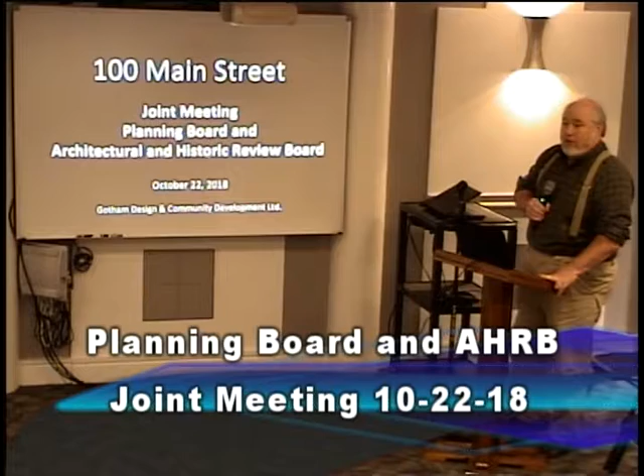The drawings we're presenting tonight are the ones submitted to both the Architectural Review Board and the Planning Board. We gave it to the Architectural Review Board as part of your submission for this joint session, and we submitted it to the Planning Board for their call for a public hearing at their next meeting. Since you guys are so familiar with it, I don't think I need to go through a lot of detail.

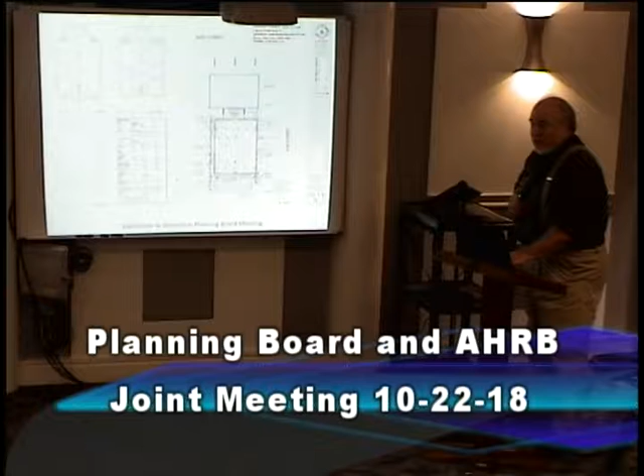Right, I think it would be good if you did. I just wanted to make sure that the 10-11 set is the most current one that we're talking about. Yes, the one that we submitted for this meeting. Okay, so these are the drawings that we submitted to you. They're obviously a little bit difficult to read in the full sheet, so what I've done is scan them to a slightly larger scale.

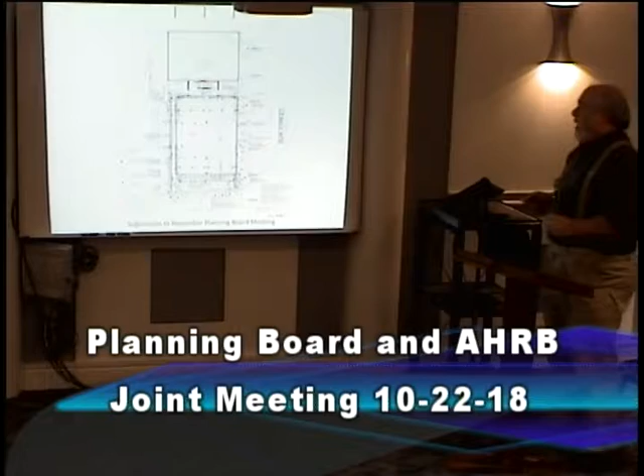This is the original building up in the front. We are proposing an addition on the back of that building, fronting on Elm Street. It's one structure. A lot of the issues we talked about a while back, maybe two years ago, with open walkways and things like that, which had comments and concerns, are not in this scheme. This is a perhaps more conventional approach to it.

What we've proposed is a total of 4 additional units, with 2 on each of the floors above, second and third floor. There are 2 existing units in the main building, which will remain 2, although we may be changing the configuration. If we can flip it, instead of having 2 duplexes, we'd have 2 flats. We'd be able to make the ground floor flat an ADA compliant unit, which we think would be a good idea.

If we look at where we're at, this is the facade facing Elm Street. This is the existing building. Here's the open area where you drive underneath the building. We've taken ideas from previous schemes.

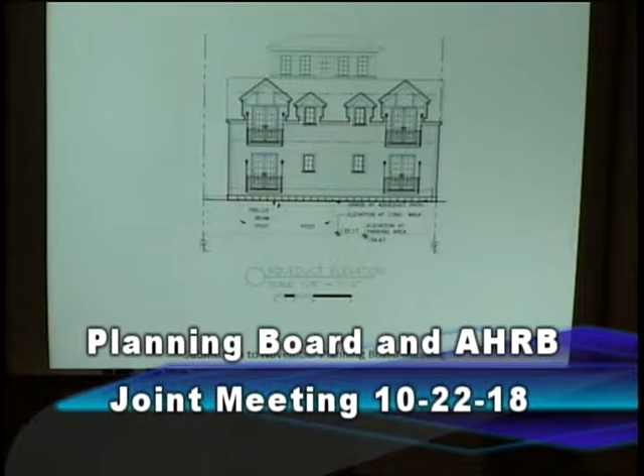One other thing I should point out, going back to that site plan, this is the existing retaining wall for the aqueduct. The closest we are here is 10.6, or 10.3 I guess. And that slopes away from us, so at this end we're around something like that. The brise soleil, or the trellis, comes out about 5 feet.

We've had a suggestion made by the village engineer. I don't know if it falls into his purview, or the planning board's, or everybody's, but he's noted that what we're doing with the spacing under the building is what we'd need if we were a commercial property. He's suggesting that if we wanted to give it some thought, we might be able to reduce the space between the parking spaces so that we'd actually be able to get the cars fully under the building, which I think would be the preference of all.

But we've also shown a significant amount of augmented screening along the aqueduct. I think most of you have walked by and seen that, even though that existing building is up on the aqueduct line, you're actually seeing trees more than anything else—you're seeing the building kind of through the trees. Obviously as we lose leaves, you'll see more of it in the wintertime. So part of what we're thinking here is augmenting the planting with broadleaf plants that don't get devoured by the deer, so that we'd have year-round screening for the building.

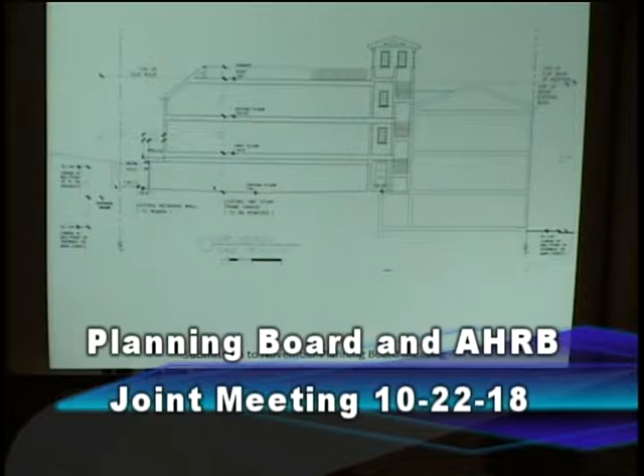Where it is, maybe it's not in here, but it probably doesn't matter. This is just other stuff we had.

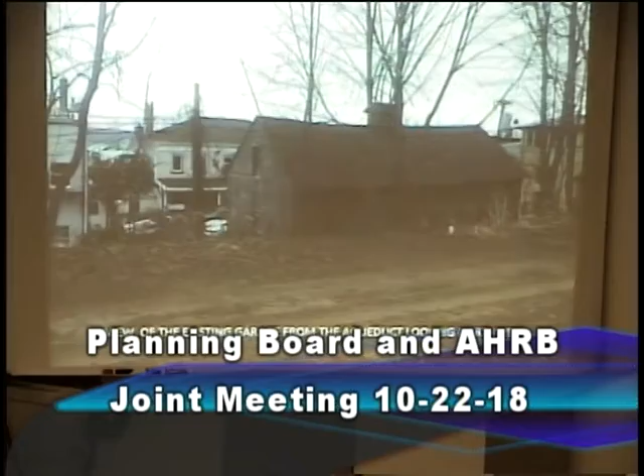Now, last thing is, I'll see if I can find it, because Steve Hunter asked if we could show some of the stuff from before, and I'm not sure that we have it. I don't think you need to see these kinds of things again. Well, actually, that's what I was thinking.

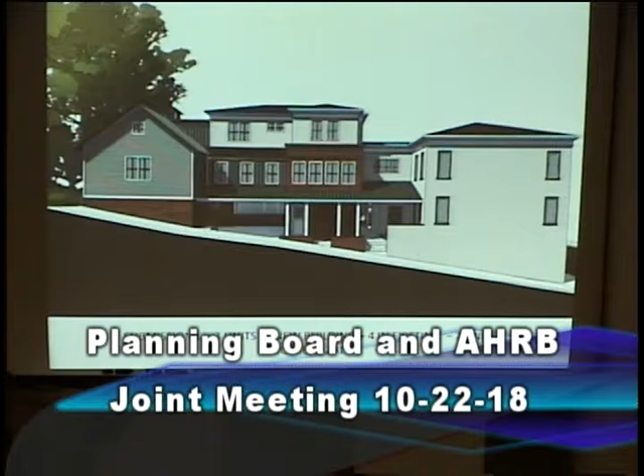Okay, so this was the design we presented in 2016, which the planning board adopted a resolution recommending for approval to the board of trustees. Obviously, this positioning is negated by the 10-foot setback to the aqueduct, so we're not really able to do it that way any longer.

Let's see if this goes away. No, that goes. The other thing is we do have a SketchUp we've done for this, and we'll try to get you some views that might make sense.

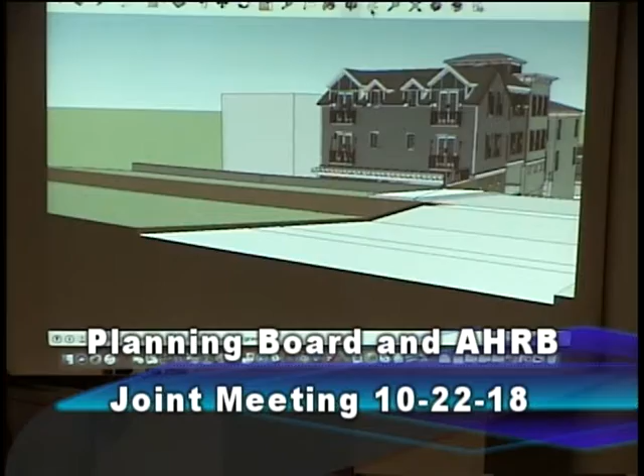So this is the view, basically from the village parking lot. If I position myself at eye level, I'd be right about there. Here you can see the gabled roof with the dormers, the balconies facing the aqueduct, the bridge part of the building where you drive under, this structure coming all the way down, being the same stucco as the front building, although I think it's important—

We're not assuming that we were at a point yet of full resolution with the architecture. The idea here is that this portion of the building, even though it's an addition, carries from the existing building in materials and detail. Everything behind that, which is the bridge and then the gable portion, would probably be in HardiePlank, a distinctly different texture and color.

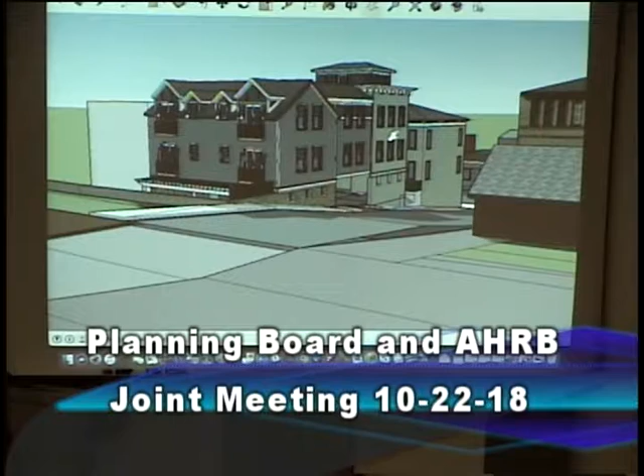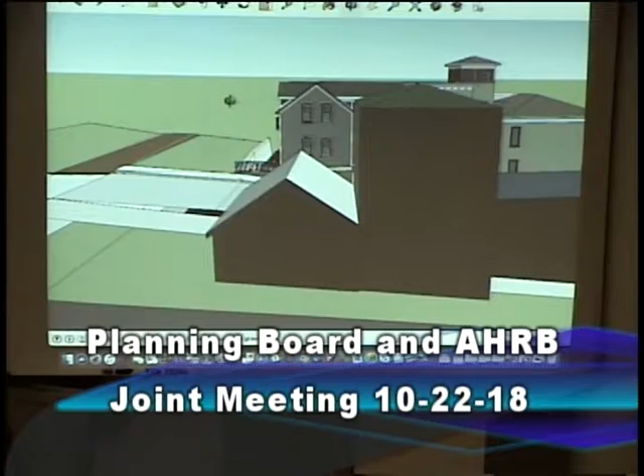I don't know if you have any questions about views you'd like to see on this, we can do that, or we can go to you guys asking questions. If you swing that around, I'm looking at that against the building across the street from it, for height.

I'm not sure, I don't have actual working drawings on the building across the street, I'm not sure how we have that. But we are compliant with the new codes adopted last August, where they eliminated the fourth story and reduced the permitted height in the downtown from 50 feet to 40 feet. So, instrumental in the way we've done this is designing it so that it meets that height.

This portion going up obviously goes taller than that, giving us access onto the roof, which I think is a good thing. If Steve would be willing at some point to give me a drawing of it, and I knew exactly what the height was, I could bring that up to being accurate so we'd have a more direct comparison between the two. But this, we've just done by photographs, I don't know that we're accurate with it.

Any other views people would like to see?

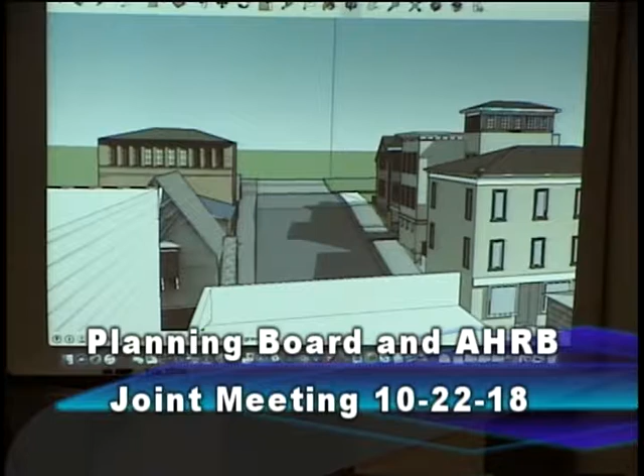No, but I want to direct the AHRB towards the design issues that the planning board felt we're not necessarily in agreement on, and where we felt there really was overlap with the AHRB.

One of the big issues, if you could rotate it so we can see the street side, is the identity issue: whether this was meant to be one building with massing changes to break down its scale, versus actually having material changes between Main Street and the aqueduct.

Right now, Patty, you have that first building, the first volume is the stucco that matches the Main Street building, and then you have a different finish cladding on the other two bays or whatever they are.

So that was one issue, a place where the kind of massing things the planning board might look at, from an architectural design point of view, overlap. I want to call the AHRB's attention to that issue. At the end of the day, are we pretending it's 3 buildings, or 2 buildings, or are we just accepting that it's 1 building with massing that breaks it up? I just want to cut to that, to the extent it helps us.

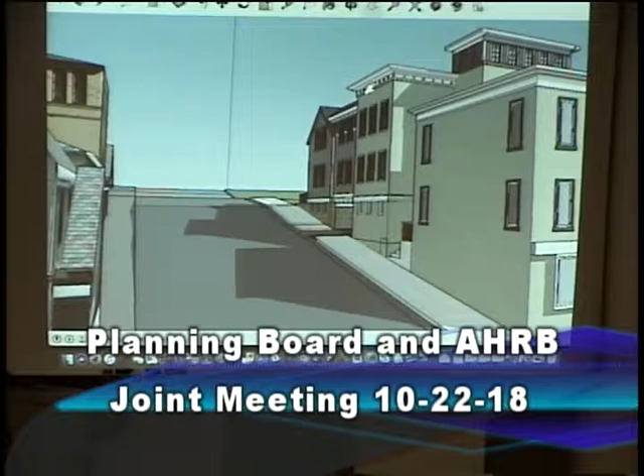I'd like to ask you to pause, because I think we're delving into a very fine scale of detail when we haven't yet dealt with the much larger issue of the problem of massing.

And this is, by conception, deeply flawed. I think the fundamental problem is too ambitious a program on too small a site.

Since the previous iteration, which I had the same comment on, I think we made that pretty clear in a memo some time ago to the Board of Trustees, both before we analyzed the existing structure and after.

We found the massing to be sort of awkward and overwhelming, and since then it has only continued on that course. You exacerbated that problem by adding significantly more massing and significantly more awkward forms.

So I think what we're left with now is something that just doesn't work on the site at all, particularly when you rotate around and you're looking at it from the parking lot of the Village Hall.

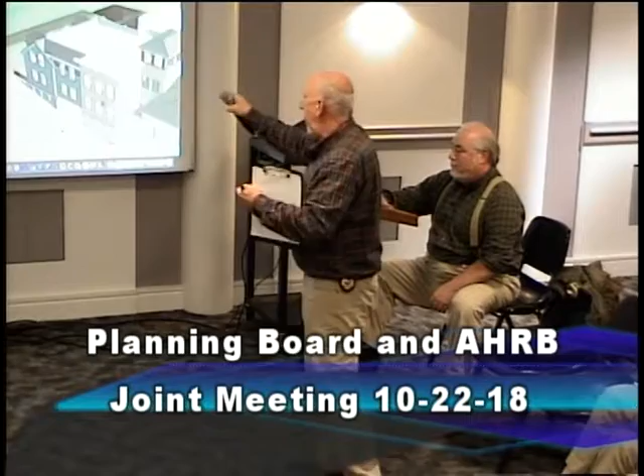So that needs to stay that width. The parking either gets a waiver to be that close, or it gets reduced and a pilot. So these are the things you need to look at. It could be less units, reduce the parking, give a pilot, give some credit for on-street parking. If you have less units and less parking, you drop one down, this whole thing can come down on that side. I mean, there are options. So I'm just telling you what's not compliant.

When we say this is here, and it's fully compliant with height and setbacks for the building, yes. For the parking and the height for that tower, no. And when you say the tower is not compliant, if it has no habitable space, it's not permitted to go up. Well, you're allowed to go up with machinery rooms, elevator shafts, things like that. If you had to get to that roof, and you wanted to have a roof deck, then you would need that tower to go higher.

But as machinery maintenance, like Brandon said, you can stop the tower there, put a hatch in the roof. I can hold the equipment a certain distance off the edge and fully blend it. The question I have though is the reverse. Is there something that says I can't have a tower that goes up as long as it's less than 20%? I think the intent of the code is to allow machinery rooms that are necessary to exceed the height limit, just to say this is not occupied.

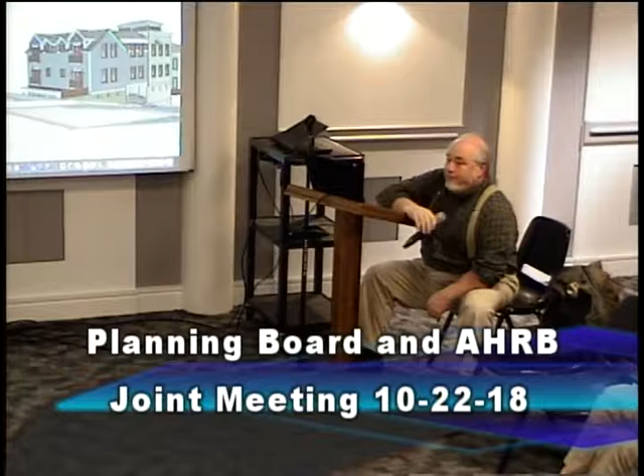Any other comments from planning board members or AHRB? I guess I'm not any clearer on what the position is with the parking. I mean, currently the barn is sitting, is it on the wall? Yeah, it's on the aqueduct wall, and there's no basement, so there's ground in that area, right? So I think part of the conundrum is that the parking is entirely below what is currently grade. And so is it building within that space? It's underground. In New York City, of course, this would not be an issue, because that's not usable area. So I think that's the conundrum we've come up against.

You shield it, you're not allowed to build a structure to even cover it. So what are the possible remedies? Is he not allowed to even excavate up to that space, up to the wall? The way to use the space would be to use the barn. You're not allowed to use the barn. Really? That was the decision of the zoning board in oh-eight, 2008. You have to take it down, get rid of it, or?

Well, we fought to save it. So in 2008, it was ordered to take it down. We went to the zoning board, and they agreed that as long as the building was used only for storage and nothing else - they didn't want cars in it - and the owner of the building made certain repairs, it would be allowed to remain, but it couldn't be changed in use. There was a proposal to actually do it as two residential units, and they denied that application.